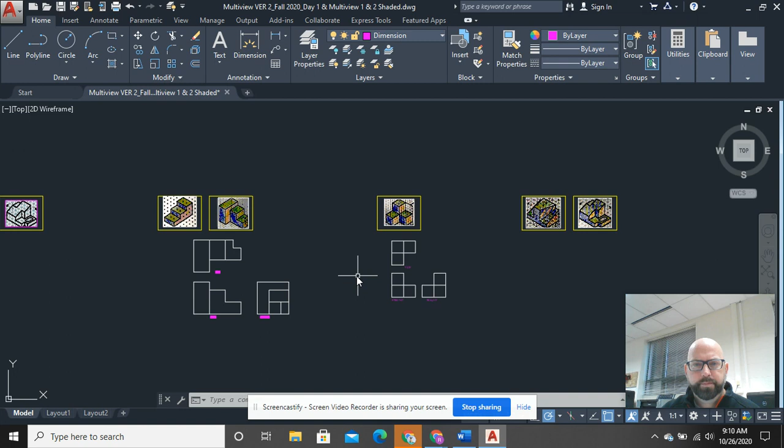All right. So on this first three multi-view drawings, again, these are completion only. Going to these next two, I did shade these to kind of give you some assistance, and those are on my website, so you can retrieve those. Again, one thing you're going to notice is that, it's not totally clear, but on the top of this object, you can see that you do have a green and a purple stripe, as well as on this one and this face.

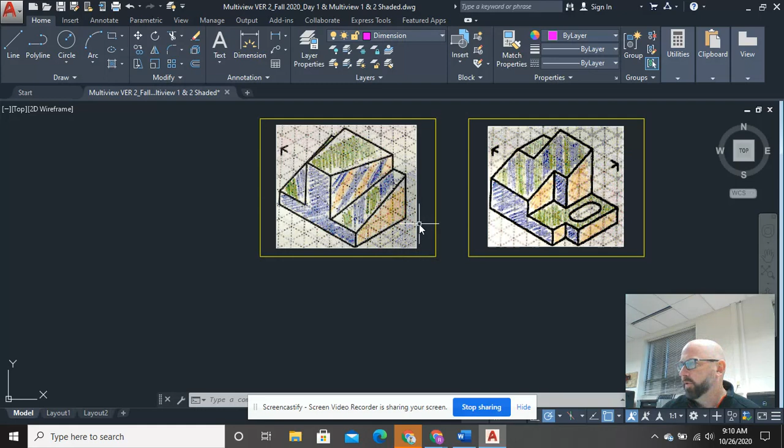And the reason that I'm kind of saving these for another demo and giving you guys an in-class head start with the demo on these is because this is where you actually see multiple faces from one perspective, meaning from the front in this, I'll see portions of the top and portions of the side as well as the front. So not too difficult, but we'll get there.

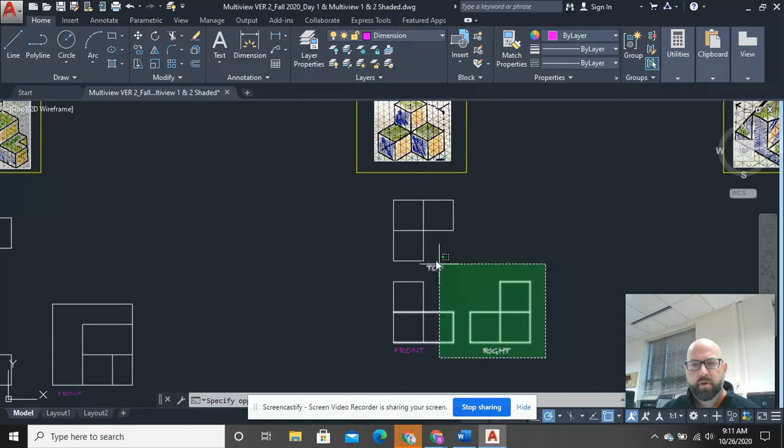I did this one. I think this was the first one that we put out for completion only. Things to focus on are making these nicely aligned and making your text size correct and everything else. Did this one also. This was the second one. So make sure that those things are correct, and spend some time looking at them on your own.

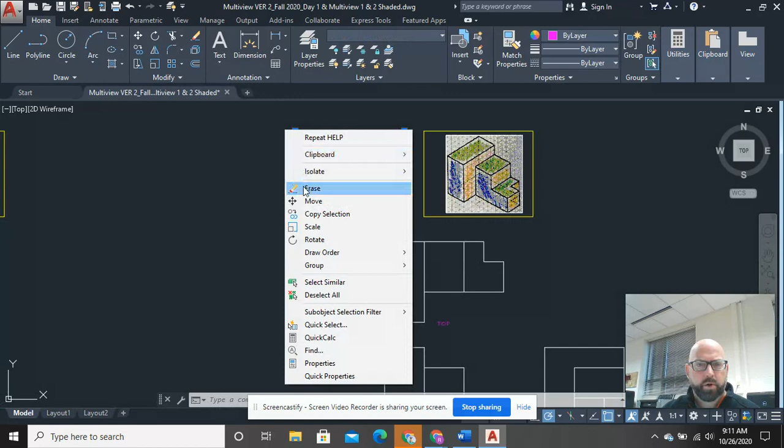Okay. I'm going to go ahead and move this one over. So this would be the second or the third one, I guess, in order. And I think this one is, to me, the easiest. It's a staircase, and most people can look and envision what a staircase looks like before they ever walk up it, or what they would see if they're standing to the side of it.

So in this case, if I look this way, the purple would be my front. This side, which is yellowish orange, would be my right. And then the green would be my top. I think the easiest way to draw this one is to kind of look at the units. So at the biggest it ever is 6 by 3, and then 3 this way. So a 6 by 3 by 3 cube we could carve this staircase out of.

Okay. So in this case, I look over, there's an easy repeating pattern to it. Once I go over 6 and up 3, I come over 2, down 1, over 2, down 1, over 2, down 1. So I can really put this thing out fairly quickly. Okay. So I can go over 6. Now I'm at the back right corner on the side of my object. I can go up 3. And now I'm at the top of the back of the step.

Now I can go over 2. And now I go down 1 step, which is a distance of 1. And then over 2 again, and down a measurement of 1. And then over 2, and down a measurement of 1.

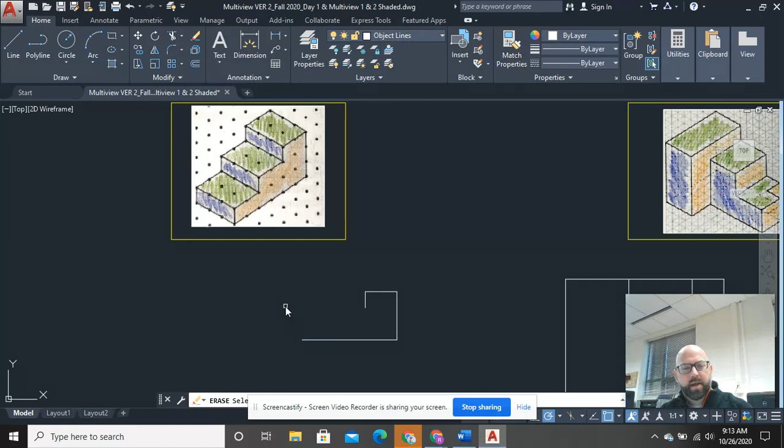Okay. I'm kind of a person who, especially when you get into technical stuff with decimal places and things like that, favors entering fewer numbers, just so you don't fat finger a key and erroneously change a measurement. So in this case, I would select those two and copy this from that base point and stick it right there and right there. And that assures me that I haven't made any mistakes as far as my measurements go.

So I'm going to move this right out of the way. Again, I kind of like it when you take a construction line and put it in there to separate the object. If you want to keep the distance the same, copy the construction line. What I'm going to do is just rotate this, because I drew that construction line at no particular distance. Now I can use this one as a spacer up here.

Okay. So again, what's the advantage of the construction lines? When I get done with the drawings, I can just turn them off and I don't have to erase anything. And it also tells me that it is really not a part of the object. It's just something that I used to get somewhere. Okay.

So now I'm going to go with object lines. And again, if I look at these steps, now some people will try to draw this and they'll draw a line up 1 and then over and then up 1 and over. We don't want to do that. We just want to give it the biggest. If we look, what's the tallest this object ever gets? It actually gets to be 3.

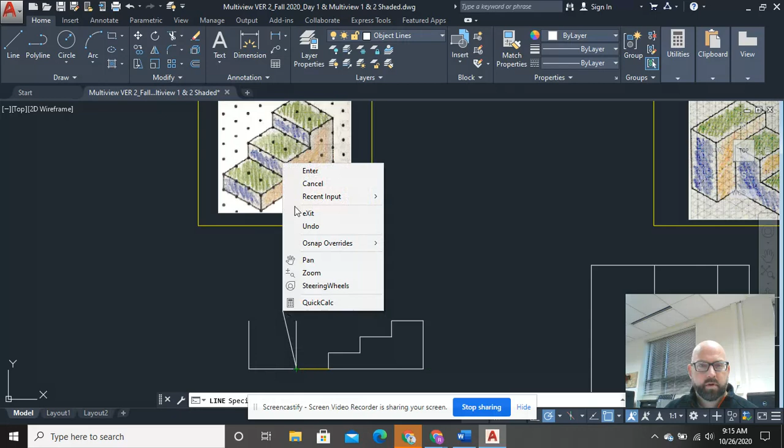And I'm not going to approximate these. Again, I'm still getting people who are copying stuff, or they're drawing lines and they say, oh, I think it's about there. That's not what we're doing. What we're doing, and I can use copy if I want to. I can go ahead and right click and say copy and select a base point anywhere I want and move in the direction I want to and just say 1 and go up again and say 1 and go up again and say 1. Oops, I didn't drop it that time.

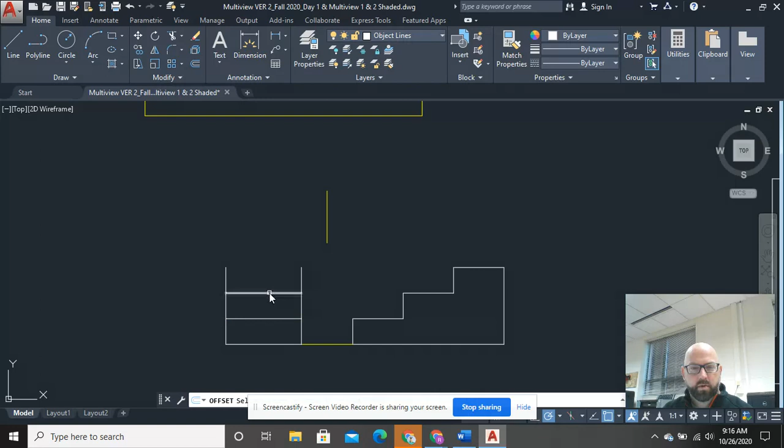Or I use my offset tool, tell it I want it to be a distance of 1, click and go, click and go, click and go, and I'm done. So that would be my front. Okay, I know I'm going to need these, right? So why not just take these right now and copy them, bring them over to this drawing, and I have them ready to use. And now I just got to do the top.

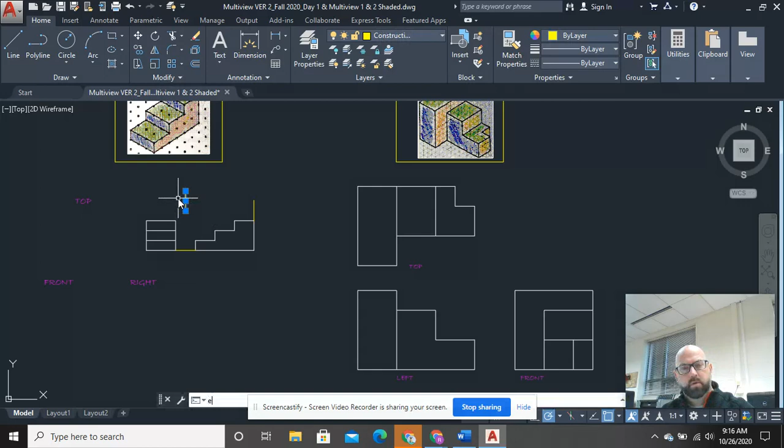Okay, so the top, again, very straightforwardly, I'm going to go ahead and put this right here. And I know it's 6, right? The length hasn't changed. I know I can offset that 3.

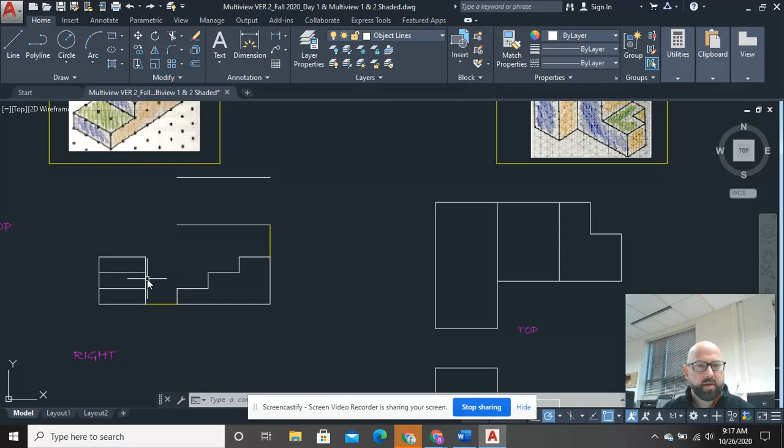And I'm a big fan of the projection method. So when I do this, I use the extend tool, EX spacebar, and I click that as the line I want that to go to. I right click, and then I click, click, click, and click. And then I just trim out what shouldn't be there. But if that's not for you, that's fine. Go ahead and take this one. So I've not yet drawn an original line on this at all.

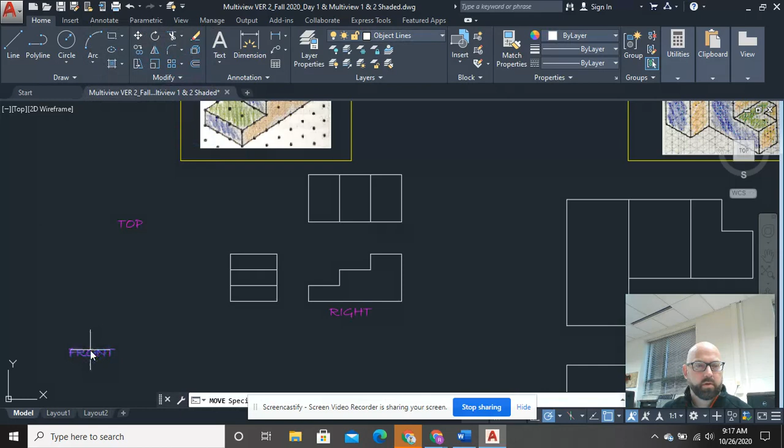Now I'm going to use an offset of 2. How do I know that? Because I go back and I see these steps are 2. Okay. Offset both of those 2. I don't need that. I don't need that. This is my right view. This is my front view. So I'm going to move it. Oops. And you don't want your text touching. We'll get into text a little bit more when we get into dimensioning, but that's that.

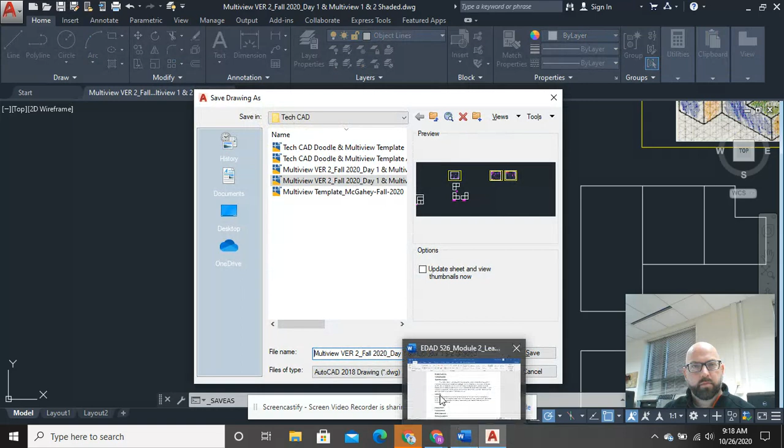All right. So I've gone ahead and drawn the whole thing. And again, what do I want to do? Why is it saying save as? Because I hit the wrong button. I hit save. And shoot, I wanted a new file. So just another blank document. I'm going to go back to my AutoCAD drawing. I'm going to zoom in on this.

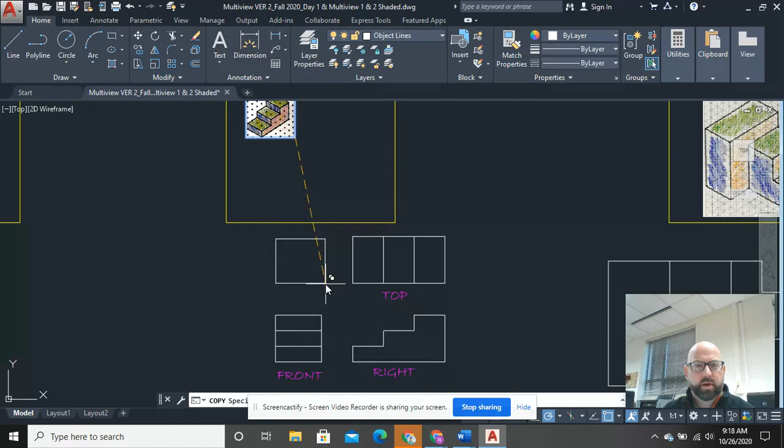If you want to turn in the thumbnail, you're totally welcome to, right? You can go ahead and copy this and stick it right in there. That way, if you hang it on your refrigerator, you got a nice depiction of what you did. Windows button, Shift, letter S. And let me show you actually before I do that. If I zoom in a little bit and then I go Windows button, Shift, letter S, I'm actually going to get a tiny bit better representation.

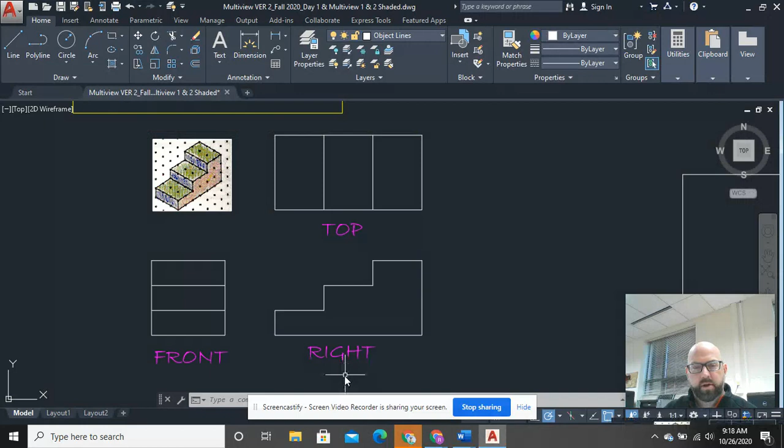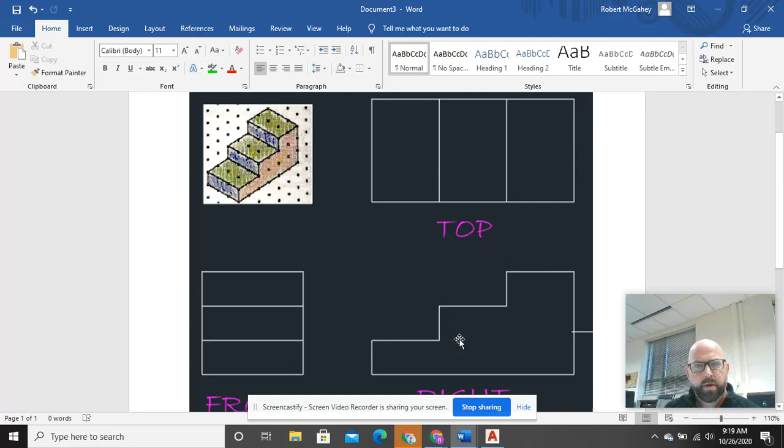And the tighter the box I draw, the better representation I'm going to get, because when I paste it, I've taken a picture of a bigger object. I'm not enlarging it as much here. I'll have a less pixelated drawing here. Okay. So that's that. All you have to do is turn it in, attach it, and you are good to go. If yours looks like mine, you nailed it.